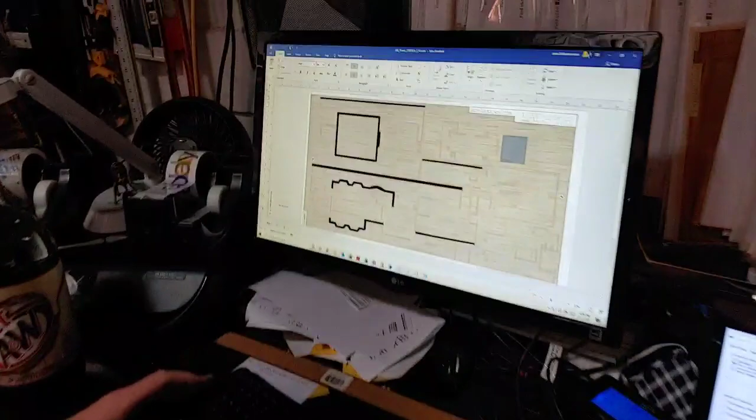So the printer is controlled by the computer here. And this is the pattern, for those of you familiar with the boat deck. This is it.

To give you an idea, when I'm editing the boat deck, this is typically the scale I work in, about 1500% magnification. This is the level I work at when doing all my little planks, rounded corners, and adjustments. Now, the printer doesn't quite exactly register with the laser cuts.

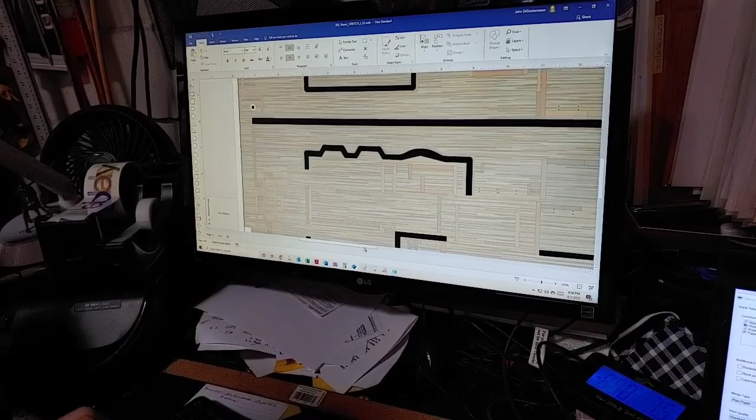So if I turn on the laser cut layer right now, this is going to look a little funky. You're going to say that doesn't line up at all. It's because I had to stretch this to make it fit. So at this end, you can see this line is pretty much going right through the middle of this shape.

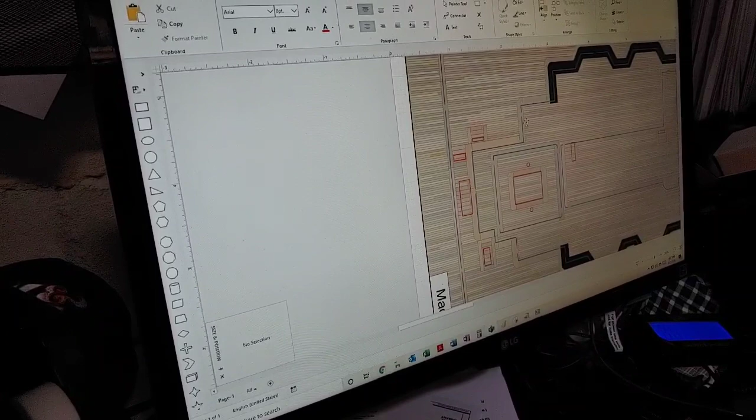And if you wonder why some lines are red and some are blue, I always cut the red first because they're little blow-away fallout pieces. The blues are more significant outer perimeters where the wood tends to curl up more, so I do them last so the wood doesn't curl while it's cutting.

So now you can see this one is roughly centered, and these are roughly centered for what we're going for. By the time I get down to the end, it's like I'm missing the target completely. Let me turn on the alignment layer.

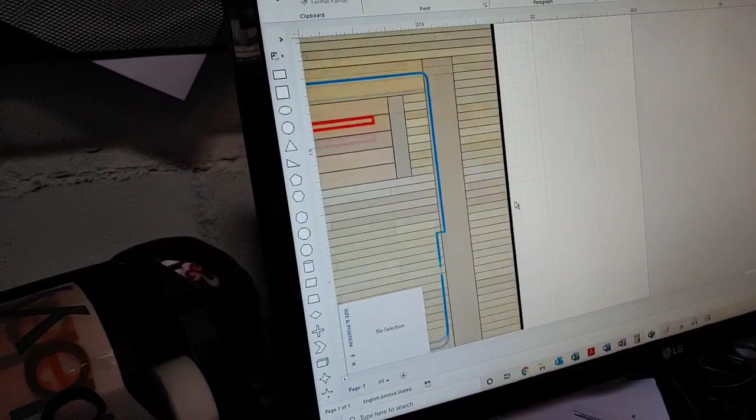So this just isn't some old guy with an X-Acto blade sitting in the mountains of California drinking beer doing it. No, this is pretty high-tech stuff. I've been involved in computer graphics since the 1970s, so I've been around doing this for a while.

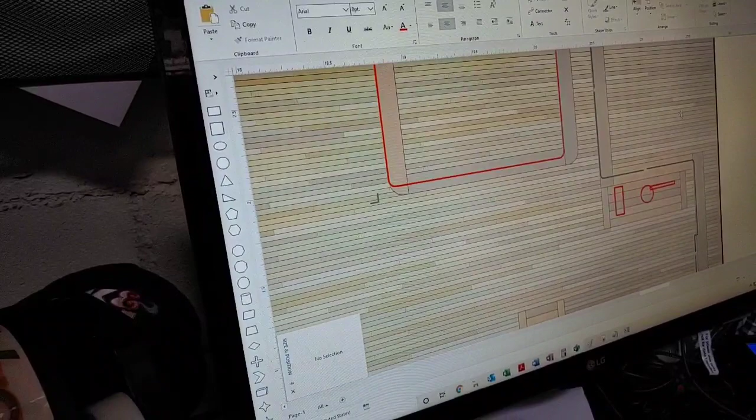So this is actually the pattern for the laser cutter. When it's supposed to do this mark at exactly 21 3/4 inches, it'll do it at 21 3/4 inches. I found that when the wood came out of the printer, it was about 1/8 of an inch short, and it wasn't reaching the alignment because the scaling on the printer is just slightly different.

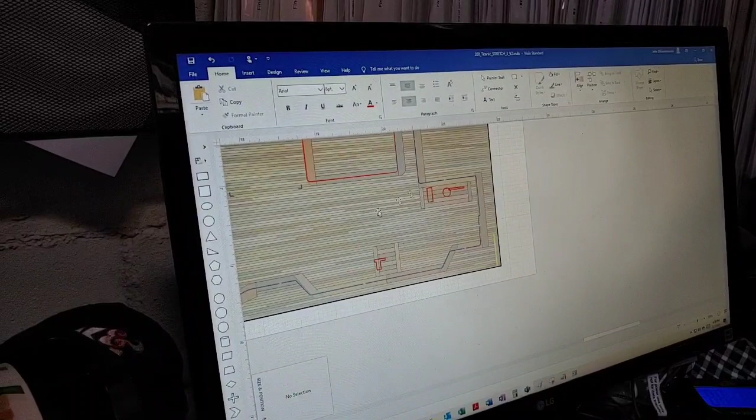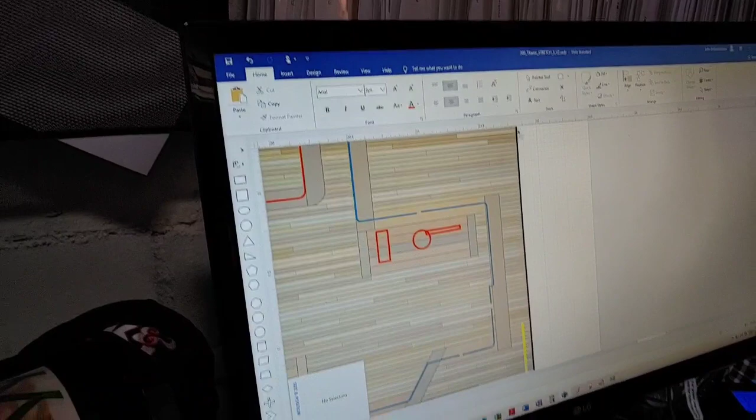So after I get everything worked out and all lined up perfectly, I have to take the print pattern for the wood and stretch it over just that tiny amount. Even though I'm telling it to print, say, 21 3/4, 7/8 inches -- that's 21 13/16, something like that -- when I tell it to go 21 13/16, it's actually going to come in at 21 3/4, and it'll be exactly the way we want it, and you'll see that once it prints.

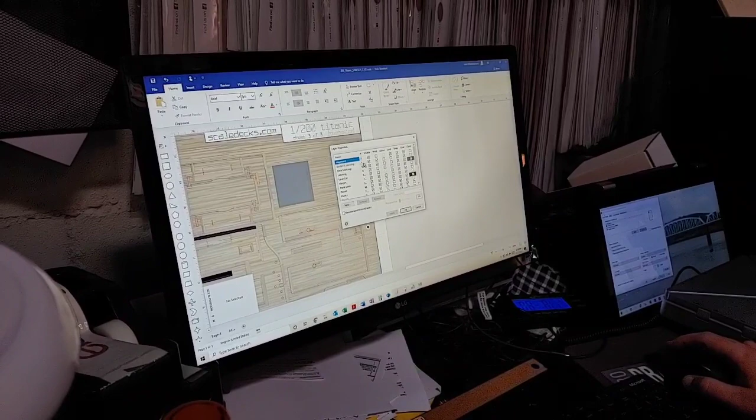So now I have all these layers, in case you want to see them. I'll give you the breakdown of the plan. What we have is the alignment, or the yellow corner marks to help me place the sheet of wood, and the border and labeling. We can turn that off -- see, that's all that stuff -- and we'll put that back on.

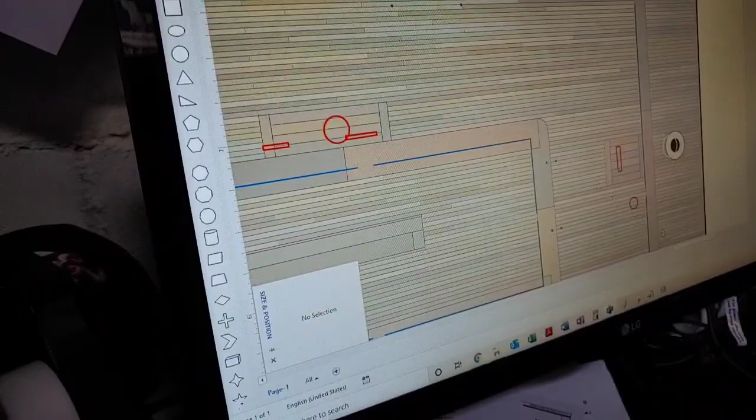The deck markings are typically the little gray dots for where the benches go. The labeling and laser cut are the blue and red lines. Let me show you here -- we'll go to right there, that's where the bench would go, and there's another bench that's going to go right there. Keep note of that, everybody -- I didn't know that until now.

So they actually have little tiny dents in the kit in the plastic deck, but I don't want to drill holes in the wood deck to indicate where the dents are, so I put those little tiny subtle gray dots. We have that, and interesting too, here's the alignment mark -- you can see how far off it is here to the right.

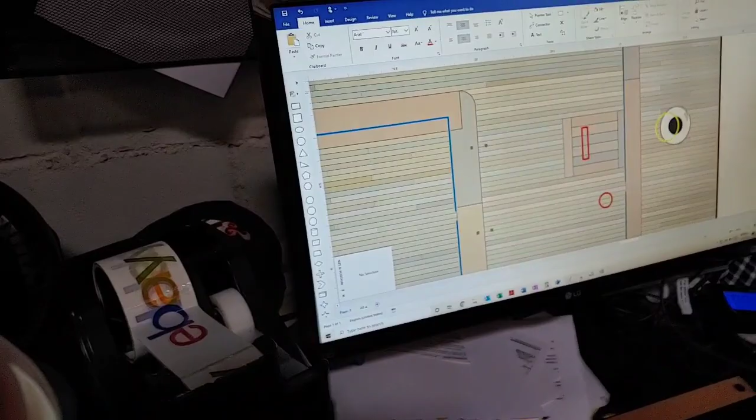But again, this is all going to line up once we get that done. So you can see the yellow target totally misses on this extreme edge, but you'll see it all works out in the end. So going back to the layers -- remind me to get photos of those gray dots before we leave so I can do a resource post on that. Sure, and so other layers, okay, here we go -- so now it gets good.

The margin are all the margin planks, so if I turn them off, you get that. And interesting, you can see this is where I've done what I call the normalization of the boards -- I've stretched certain boards or made them longer so everything works out right. I hide that under the margin planks, so you never see that.

You're getting to see behind the curtains here, so that's pretty revealing stuff.

If you look really close at the planks, you'll notice the longitudinal lines separating them are actually darker than the butt cuts. That's because the edges of the boards were rounded, so they cast shadows and caught a little light. When they did butt splices, two boards end to end, it was just two boards pressing, so those lines are really light and subtle. When you print this, you can barely see them. They're much more dramatic here.

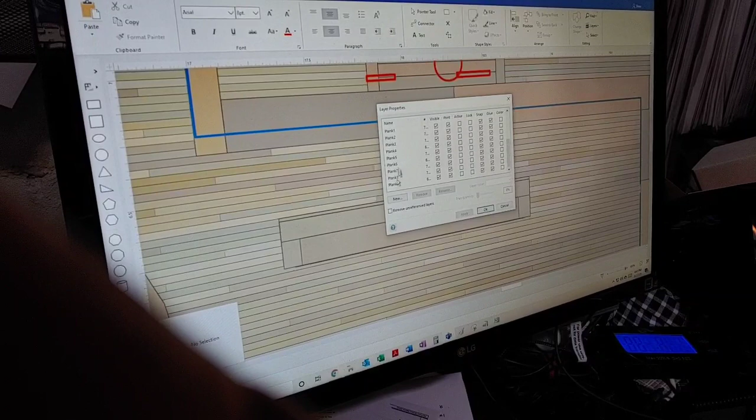So again, there's the margins. Let's see what else we have in this plan. Past that, there's all the plank lines, and these are all the different colored planks. If you want to know how many different colors of wood there are, the answer is 10 - plank 0 through plank 9.

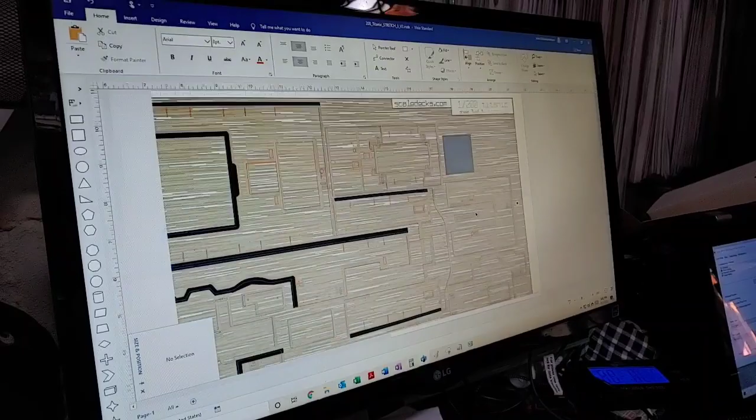If I pick one at random and turn it off, let's turn off plank 4 and see what this does to the pattern. Wow, those are all the plank 4s. If you want to see where those are distributed, that's a lot of wood - they're pretty randomly distributed throughout the whole deck of the ship.

And what if a woodchuck chucked that wood? Yeah, exactly. So we'll put all the plank 4s back.

So we go back to layers. This is when I was adjusting the tints, trying to get the yellow pine right. I'd say it's a little too green, so I'd find the greenest plank to make it a little less green. Or it's too dark, so I'd find the darker planks and lighten them. If it's too contrasty, I'd work that magic in between. So turn plank 4 back on, apply it, there we go.

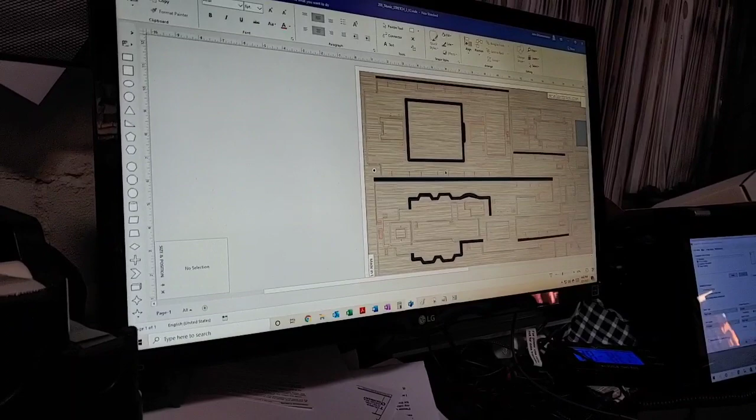So again, this is the Print Master. This is what I worked on - all those hours upon hours of getting not only the laser cuts right, but all the individual planks, the margins, and the waterways.

Here's a good example of the nibbing we were talking about earlier. You'd see a curve that goes along, but they cut off the ends of all these boards. This is actually a custom polygon shape.

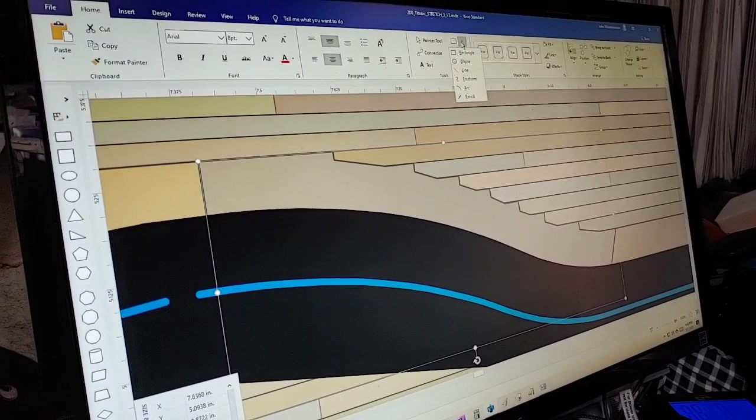If I go in here just to see it, these are all the points, and I can look at this and go, oh, that one's a little bit off - has to be off by at least 1/1000th of an inch. So I'm going to straighten that up. Nope, don't want to do it. Let me see, you can say I put it there - that's not right, I better put it right here. So right there - oh, that's not right either.

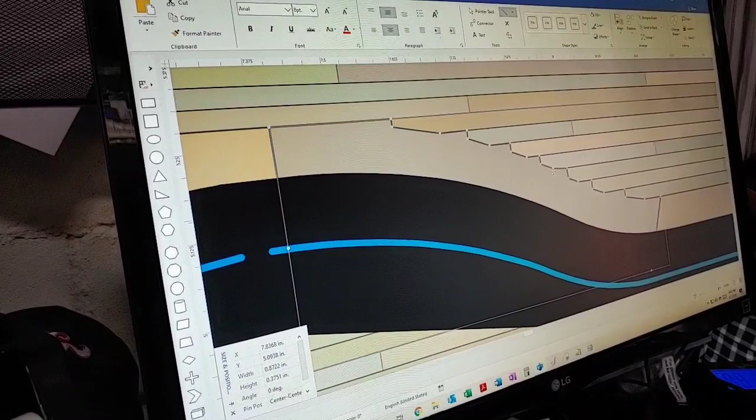It's got some other sort of reference point it's trying to go to. That may be better, may not be better, I don't know. When you look at this the whole time, it's a very, very subtle detail. But that's the work we did for all these nibbing pieces all the way around - you can see it there and all the way back.

And there's rivet counters, and then there's nail counters. Yeah, and I'm definitely a plank counter. You got to make sure the planks are right, because that's what you people are paying for, and I do my best to get them there.

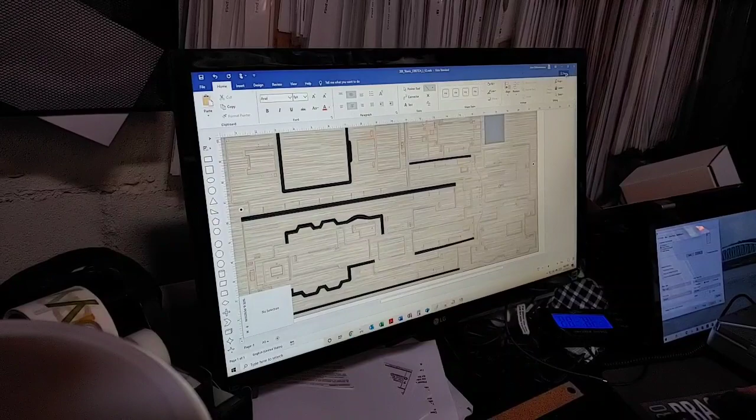So now, if we look at this, this is what's visible on the screen - everything's visible, you can see it all. When it comes time to print the wood, I am not going to print the alignment marks, those yellow marks or the yellow dot - that's just going to confuse everything. I'm not going to print the labeling, which is my instruction labeling, and I'm not going to print the laser cut lines.

So if I say OK and do File Print, it shows me the pattern, and now this is exactly what's going to go to the printer. You can see the little gray marks for the benches, but there are no red and blue laser cut lines - those are not going to print.

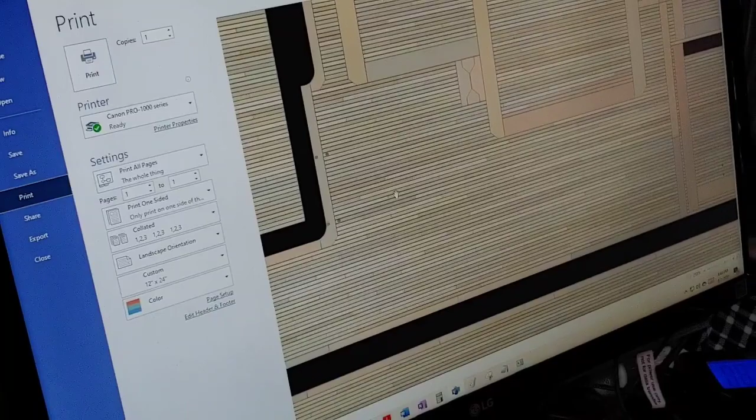So that's going to my Canon Pro 1000 series, for a 12 by 24 inch sheet of paper. I take a look at it, zoom out - I should have this much leftover wood at the end. It's going the full width, not doing a page break or anything stupid, so we're good.

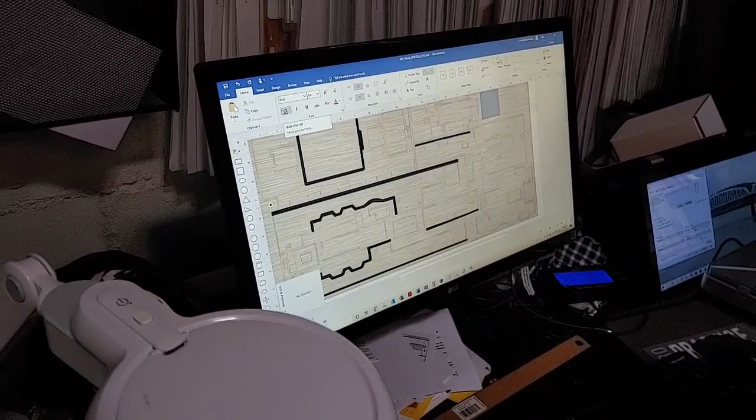So I print one, and we'll do the first test print, here we go. And how long does it take for the first one? For a sheet? You're about to see it.

I'll answer that question by a demonstration. There are 10 sheets of wood in the printer right now, and here comes the first one. The printer is warming up and loading its ink tanks and doing all that. There it goes.

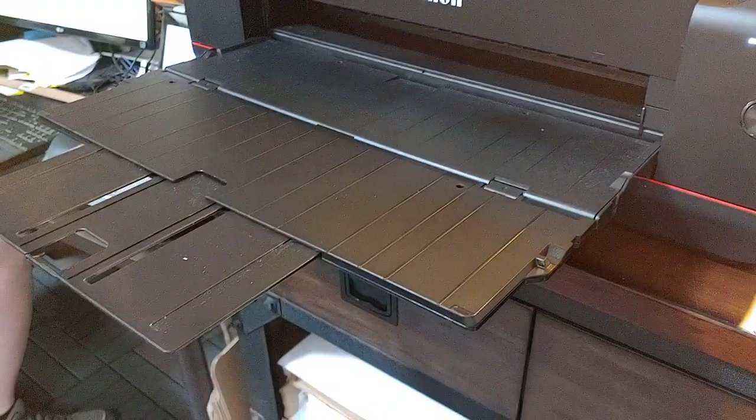Once that peeks off the bottom of the printer, I make sure that the margins are right, left and right. Then I'll tell it to print the next 9, and then we'll move on to the next step.

Is that when you check it over on the table, when you lay it on your previous laser cut? I will, that's for an alignment step. So now I look at it, I want to make sure everything's right, that it's centered between the pieces of wood. The printer knows what it's printing on, it knows it's got the margins, it's lining up nicely on the piece of wood. That's good, so now I tell it to print 9 more.

You know, without these even being laser cut, these would be worth framing. They look nice, they're pretty amazing.

Okay, so now 9 more are on the way. That printer's going to crank out 10 of them. And so while that's happening, now let's get the laser cutter started. So if we go over to the laser cutter, let's take a trip over here and see what it looks like.

How long do you have to wait for that to put the coating on it? I do not coat them. They're pre-coated for inkjet printing, and I send them out natural wood. I let the modeler, if they want to do something with it, to sand it, to make the color subtle, or chalk it, or pastel it, I don't put any sort of coating on it. I misunderstood that, I thought you coated them after they print. Oh no, it's before the ink goes down. So I get it from the mill with the coating on it.

So there we go, so let's go over here. In fact, wow, I think I can show you. Look at this guys, that wasn't even, what, 4 minutes, 3 minutes? Yeah, it's pretty quick. So here's some other ones.

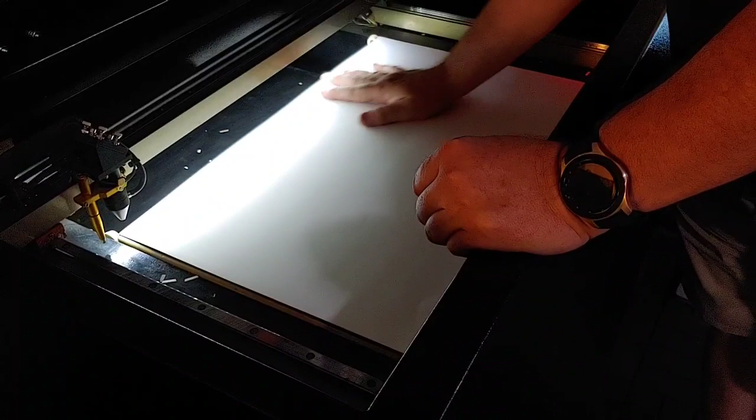So here we go, all right, over here to the laser cutter. Right now inside I just have a big piece of cardstock, and this is what I'm going to be laying the wood patterns on, but I need an alignment pattern. So I'm going to go back over here to the computer and get that cutter to do its thing.

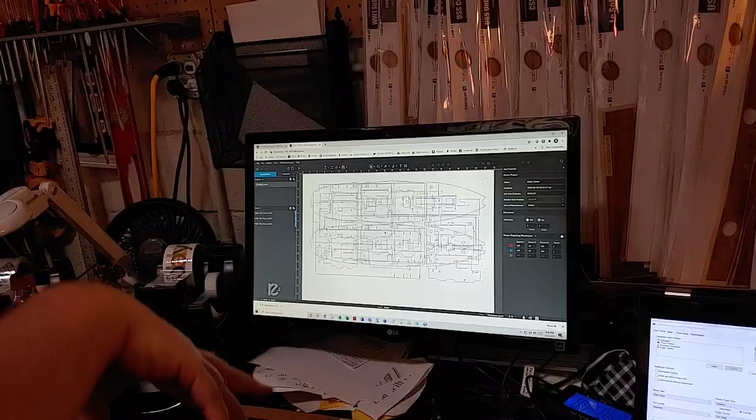And we're left with this. If you want to see what sheet 1 looks like, that's the most distinctive shapes. I can turn off sheet 3. There we go. So this is the box fit cut, and this is the high detail cut.

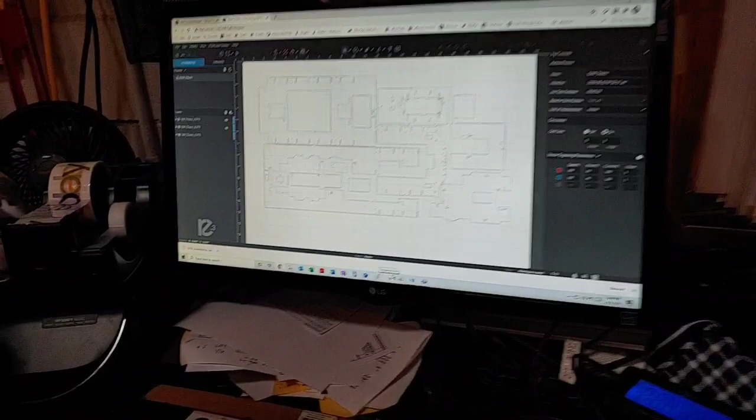We're going to turn off sheet 1 and turn on sheet 3, because that's what we're going to be cutting. So this is the pattern that we're going to cut. That should be recognizable as the boat deck for those of you following along.

To cut through this thin sheet of wood, I run the cutter at about 40% power, which is fine. Those yellow alignment marks, remember I showed you those, and there's this little circle right here. That's going to help me line up the wood and make sure I get it right.

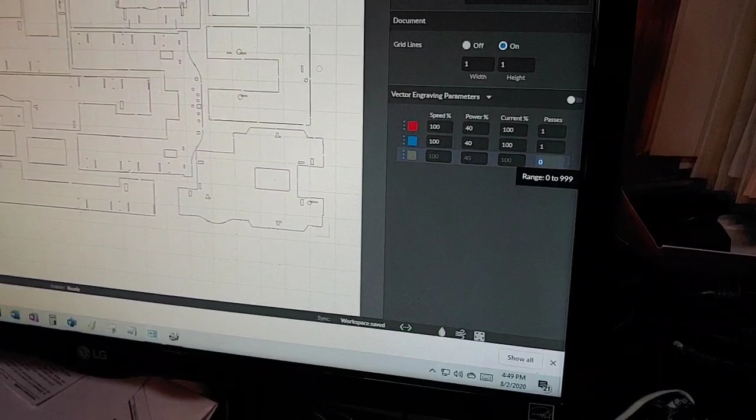Those, I'm going to run at 100% power and make 2 passes on them. That's going to make sure it really gets through that much thicker cardstock.

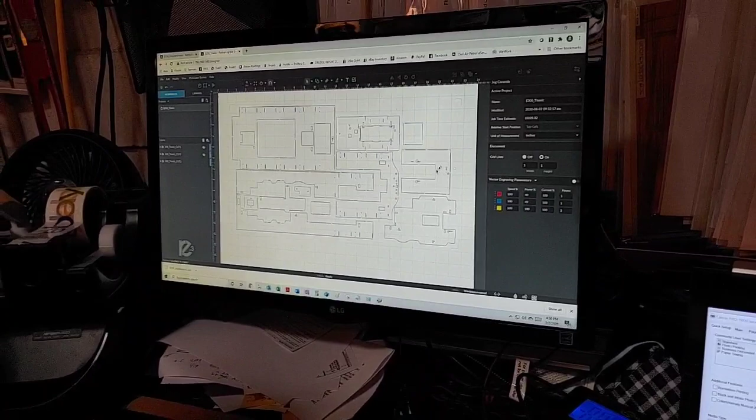So the order it's going to go is it'll start by cutting all the red shapes. Again, those are little detail holes that aren't going to violate the integrity of the cardstock at all. Then it'll do all the blue, which are longer cuts that can make the cardstock separate a little bit and shift around. That's why we do all the red first. And then the last thing it'll cut is the yellow corner marks and those 2 little alignment circles.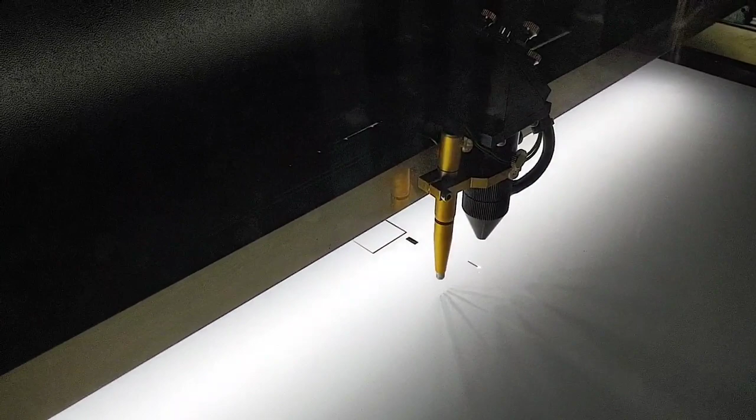And how many times do you use your alignment for each sheet? A lot. Yeah, so right now I'm planning on doing a run of 20. I will probably use this sheet of cardstock for all 20. Now, actually I do 2 of them, and we'll show that in a minute of why I do that.

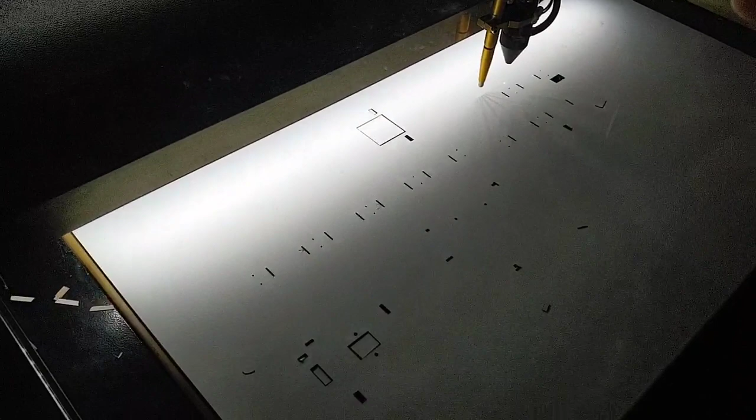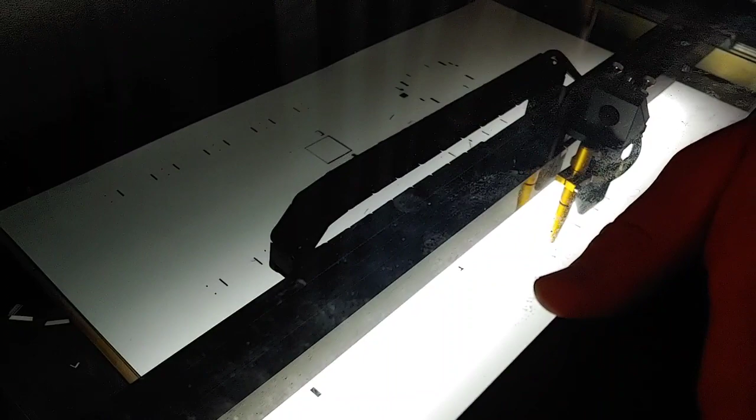Typically I can easily get 10, 15, 20 out of a card. If the laser goes weird, if it loses something, if it has a hiccup, it'll screw up the pattern and I may have to go back and cut a new one, but that's more the exception than the rule. Usually the cardstock runs are good for the entire run.

But you've done this so many times, you know what to look for if it's a nuisance. Oh yeah. And it's usually pretty dramatic. So weird things can happen, particularly not so much on this cutter. This is a much better cutter than the little Muse I have next door. It's got much better tolerances, less prone to error.

That's what the last 2 of my Emden Dresden are for. To give you an example of the engineering on this, I'm going to unlock the head here. So this is the gantry. This is the way a laser cutter works.

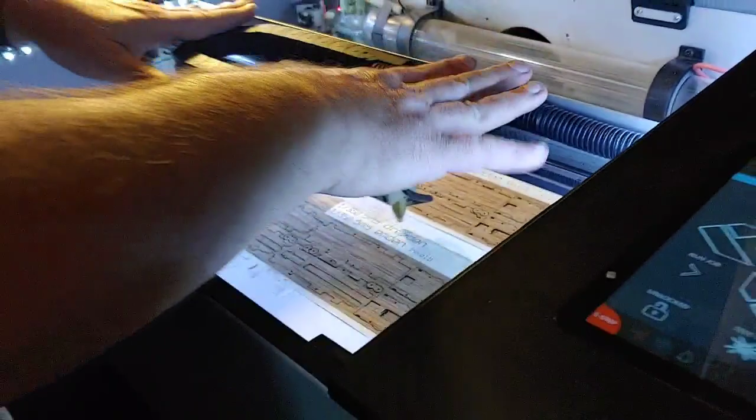The head moves left to right, the gantry moves front to back. That glass tube in the back is the actual laser. That's it, and it doesn't move, it just fires its laser beam into that mirror, which hits this mirror, which hits this mirror, which directs it down into the material that it's cutting.

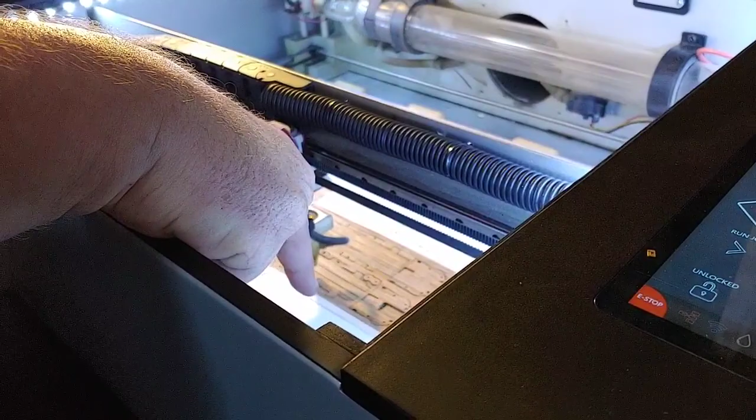Wow. So, to say this works with all smoke and mirrors is absolutely what it does. It just moves the mirrors around to put the cut where you want it to go.

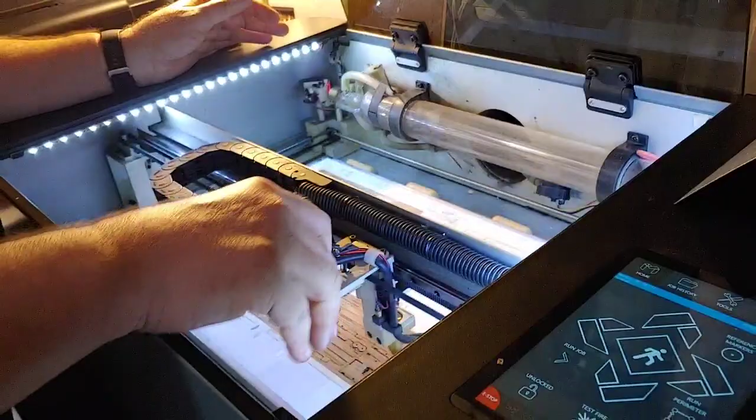But one thing about this design, if you look at it, it's got this rail up here, and these lights were an add-in feature for this model cutter, which is really nice when looking at the workspace. But believe it or not, they're just held in by a hot glue gun. It's not screwed in or bolted or clipped, it's just hot glue.

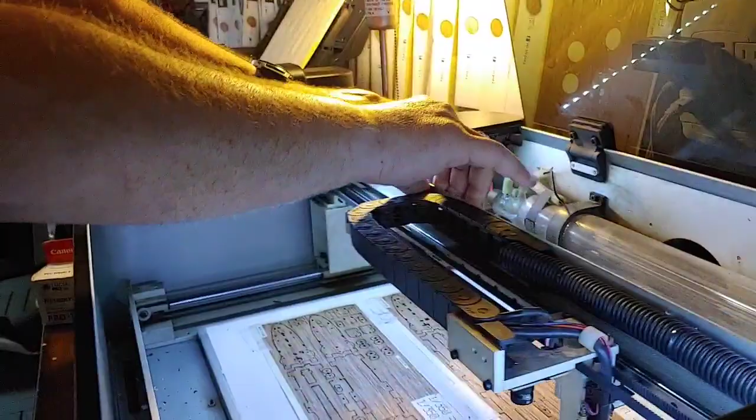Well, it's hot in here right now, and the other day one of the lights dropped out a little bit. It came down and caught the top of the gantry, jamming it, so it couldn't move. The laser cutter was just going back and forth while the gantry wasn't moving, so it was cutting this huge, deep burn mark.

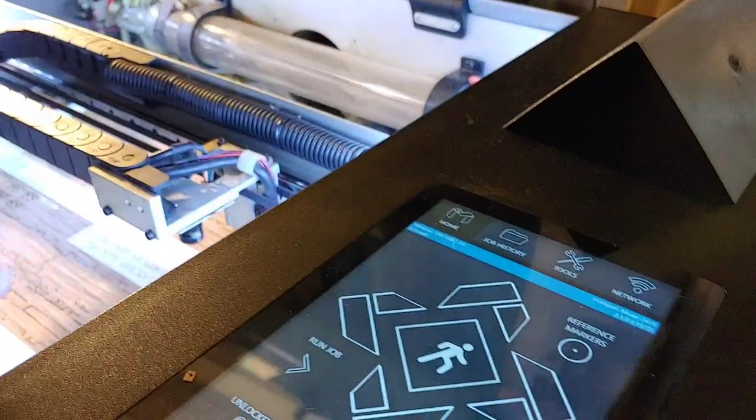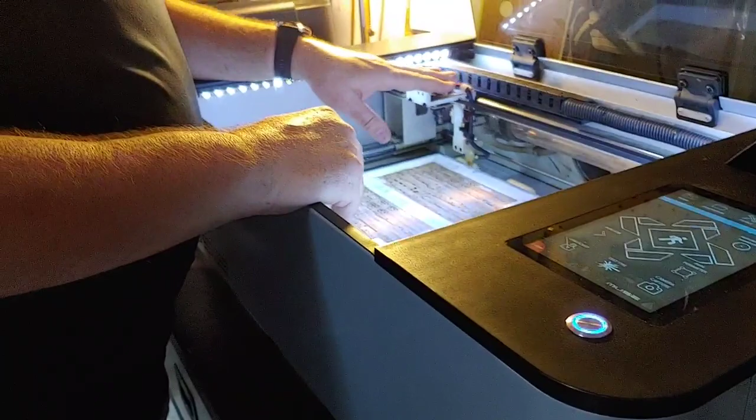So then what do you do? You pop this off, take it in, reattach the lights, get it so it all clears, get it so it works, and away you go. But just little mechanical things like that, you know, after a while you learn it's all part of the process.

So is this one a mirror laser too, or is it a direct? Same thing. If you look over here, the laser actually starts in this extension box and goes all the way across the back and ends about here.

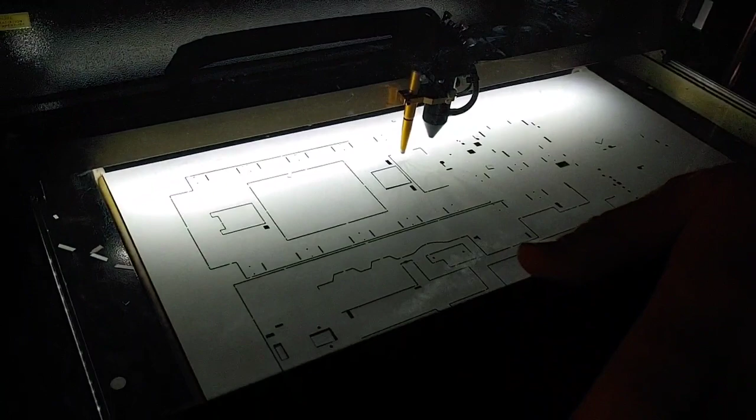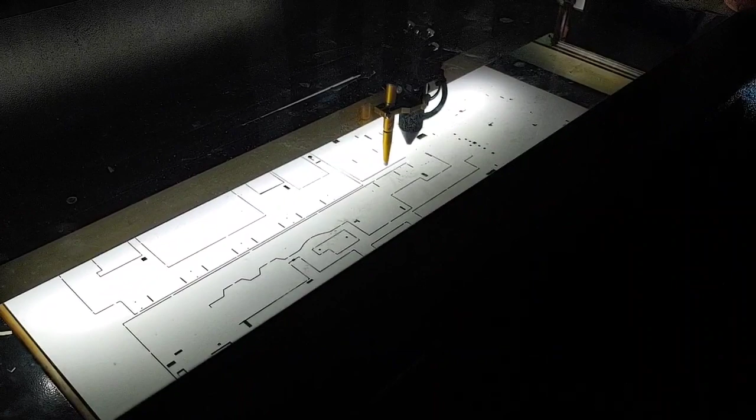That's a 40 watt laser or a 45 watt. I have the more powerful one, a 45 watt laser. This is a 90 watt laser. The reason this laser is so much more powerful is because the head moves faster. If the head moves faster, it spends less time over the material, so you need more power to ablate through it. I was surprised that since it's twice as powerful, I started running it at half the cutting power as the one over there, because the laser's twice as powerful, but the head moves twice as fast. So I run both these machines at about 35 to 40% to cut through the material.

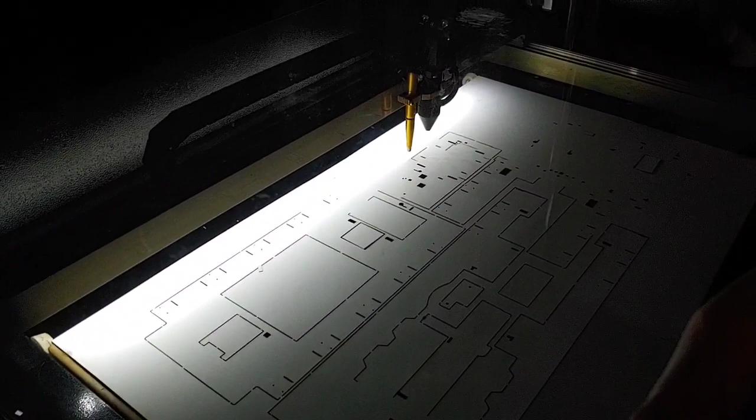So now it's on the blue lines, the way it goes. That one is set and ready to go. I have another tray exactly like it right here.

I haven't taped the tape to the front yet because these trays tend to flex a little bit side to side. One of the biggest things I was working on with the Titanic was finding a way to get these trays to absolutely lock in place. So I ended up putting these wood brackets on them to give them a little more width to the side, so they just fit snugly in the cutter frame.

The other thing I did, we can see it when I take that one out, is I put in these little bumpers like we have up here. I added those front and back, so it keeps the tray in one position front to back, and the wood keeps it tight side to side, so it should go in pretty much exactly the same position.

I was going to ask you how you did the register from machine to machine. Yeah, and that was tough. That took me a long time to get that system right. Believe it or not, this little Muse cutter, I use...

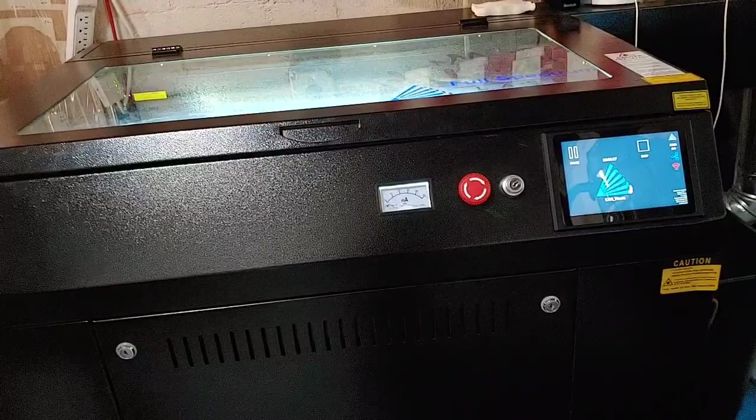Basically the bumpers that I use on there are the little rubber bumpers that go on the underside of toilet seats, the little self-adhesive ones. They're perfect for locking the tray in.

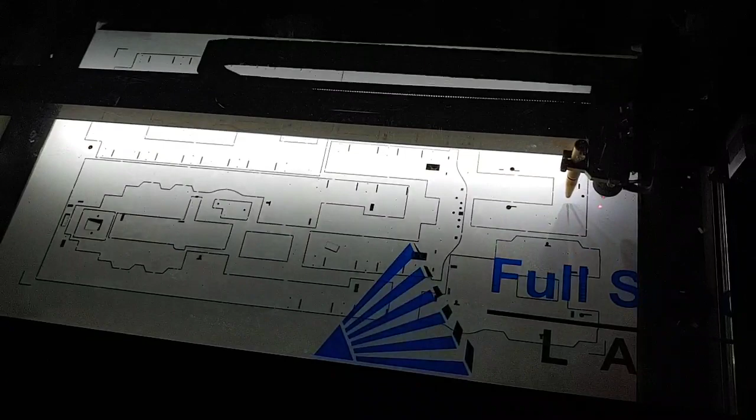So right now this is down to 16 seconds. Now it's cutting the corner marks. There's that circle target. Next corner over there, corner in the upper right, up circle, now the corner in the upper right, and it's done.

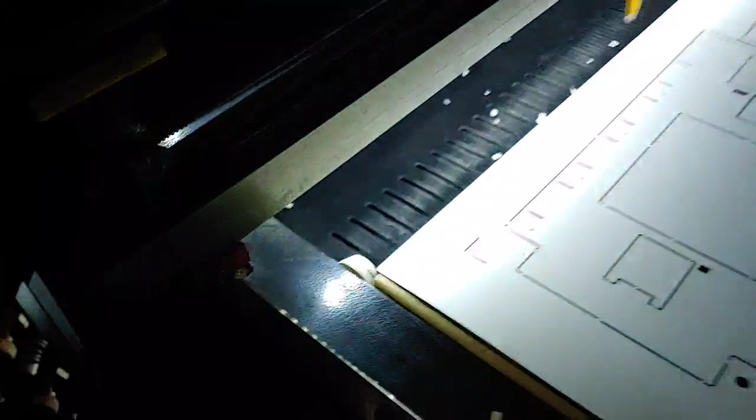Okay, so I'm going to... I see those bumpers, there they are. So those bumpers keep it from going front to back, and then the wood fits exactly in between these two rails here to keep it from going side to side.

So we'll see that as we put the next one in. Here's a blank one. It goes in like so, I press it down, nowhere for it to go. So now I've got my alignment done. I tape this down, that looks good. Close the lid, I tell it to repeat the last job, and it's going to do the exact thing all over again.

So now we go over to the printer. Let's see, I've got 1, 2, 3, 4, 5, 6, within seconds of being done. So you can see that printing is not what takes all the time.

I go over here to my other rolling cutter, and we're just going to take the little tail off. So 1, 2, 3.

So typically, again, when I'm not narrating, this is getting in the way. There's my little guide mark for width, so let me take that out.

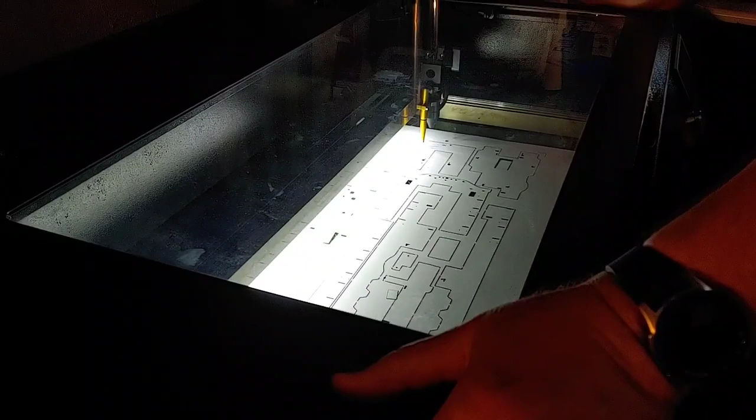Out with the old, in with the new. I only have to do one change now. One question before you close that.

Being that this is the first one, you will know by looking at it, since you've done so many already, whether or not you need to adjust anything. There shouldn't be anything adjusting. If it comes out hideously wrong, then yeah.

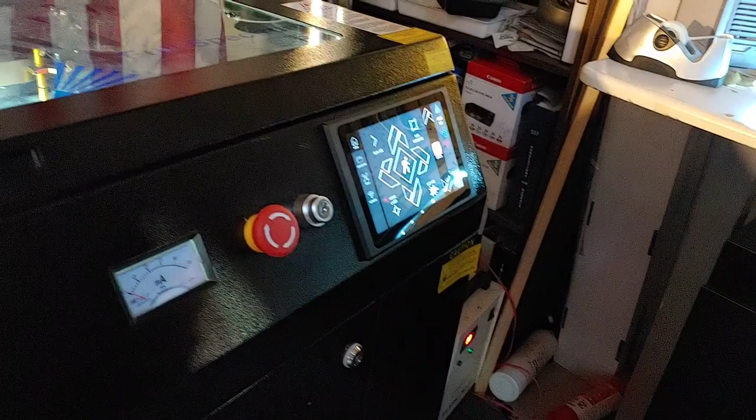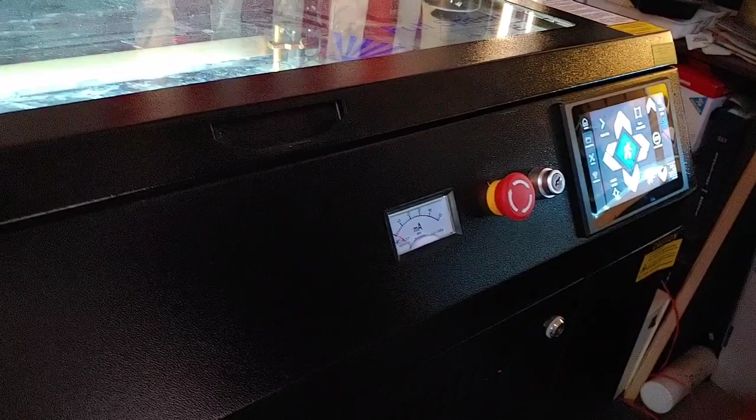Okay, so let me show you one thing that I always do. In between each one, I hit this button, which is home laser, which tells the laser to go back to where it knows is its distinct home. If it hits an edge, it catches a little scrap piece of paper that jams up the wheel. If you know anything about navigation, it uses a technique called dead reckoning. It says, I'm at 0,0, because I moved 10 inches over, so I'm 10 inches over. Now if I move 2 to the right, I'm 8 inches over.

If I move 2 down, I'm 8 inches over and 2 down. So it tracks all of its movements and adds them all up. If something screws up a movement, it's not where it thinks it is, and then everything else gets off alignment. Some of the Heidelberg mini 4-color presses that printed day in and day out, if you didn't go back to home after doing a run and you hung another plate, it was completely lost. Yeah, exactly. So it's just a habit I got into.

So now that was set to cut cardstock. So now to change it to cut wood - oh, my printer, you're lucky, we have to replace an ink cartridge. That'll be exciting. But before we do that, let's go here.

Now remember, I'm cutting the red, I'm cutting the blue, and I'm doing 2 passes, super intense burn, of the alignment marks. I don't need to cut the alignment marks because I'm cutting the finished product work, and I don't want to put holes in that. So now I just turn off the yellow, and now for the next 20 jobs, I'll just repeat that.

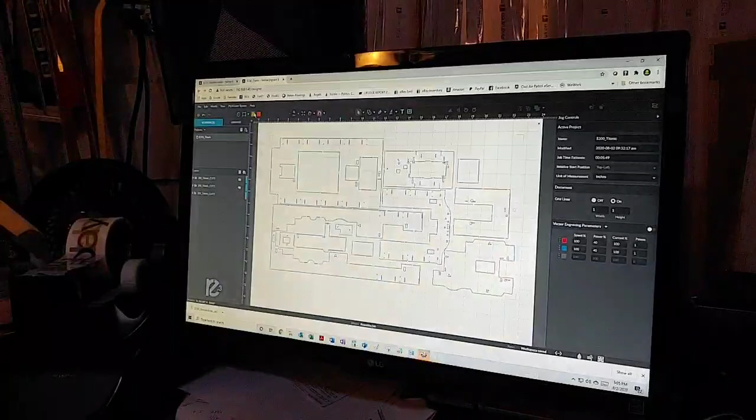And so start that running, the cutter goes, the printer says it's out of ink, so let's do the ink. So how much, taking that one step out, how much does that take off the time? 8 seconds. That's not the point.

The main reason that I do it is I need - this is yellow, one cartridge, guys. This is the size of a pop bottle almost. That's one ink cartridge, and this printer uses 12 of them. 12, and they are $70 a piece. Next time you guys complain about printer ink - 12, at $70 a piece, yeah.

And not to mention, how much was that box of paper, $250? $1,000? That's $1,000. Over here, 250 sheets is $2,000.

Okay, pop out the yellow cartridge. Push it in. It's out. Yellow goes back in. Close the door. Open the tray.

What a lot of people don't realize is that the difference between an inkjet and a laser printer is completely different, totally different technologies. When I first started doing Scaledecks, I was working on laser printers, but the toner flakes off, which was interesting. The color just didn't play with the wood as well as the ink does. It soaks up real nice and gets a better consistent color, and you can get these big, huge inkjet printers, whereas big, massive laser printers to handle large sheets of wood like this, they're much harder to come by.

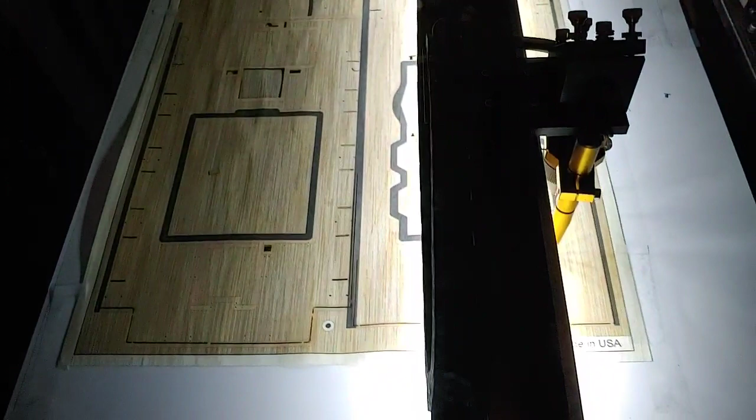And if you'll recall, I had that line pretty much perfectly centered there at the margin at the left. If you looked at it, that's pretty darn close to centered, right? The vertical line right to the right of Made in the USA - that's what I homed in, and I wanted that to be pretty close to centered. And that's looking pretty darn good.

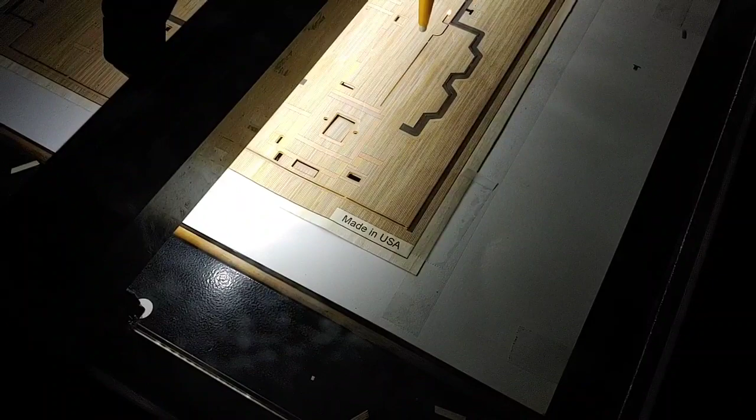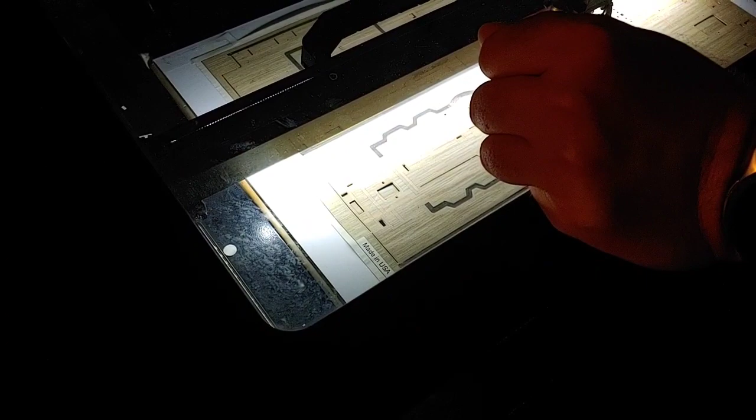So again, it's all about getting the wood placed on the tray where you want it to be and getting the tray placed consistently every time. That is the weak link in my system. If there's going to be a failure, the odds are that's where it is. I mean, I have my share of printer failures and other failures, but that's the common one.

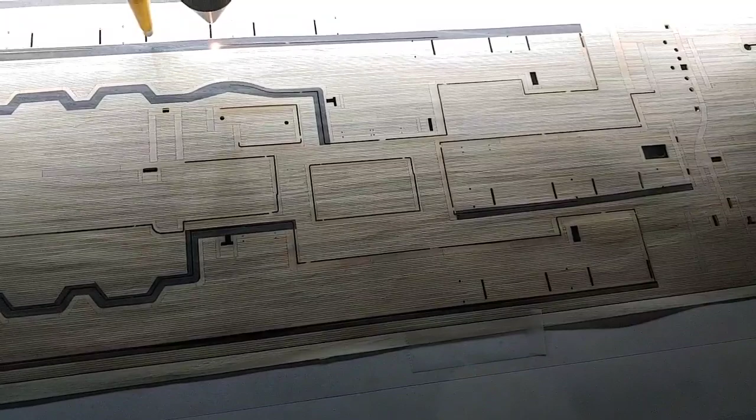So now if you look at that in the head, see those little gray dots? See it right there? And if you didn't know they were there, they're not going to be too offensive to you, as opposed to the holes, which I think would be more offensive. So I have looked at the Scaledecks photos and reposted them on the group. Somebody's asked me a question about something, and I'll pull it up and I'll look at it, and I never noticed what those gray dots were until you mentioned it. They're very subtle.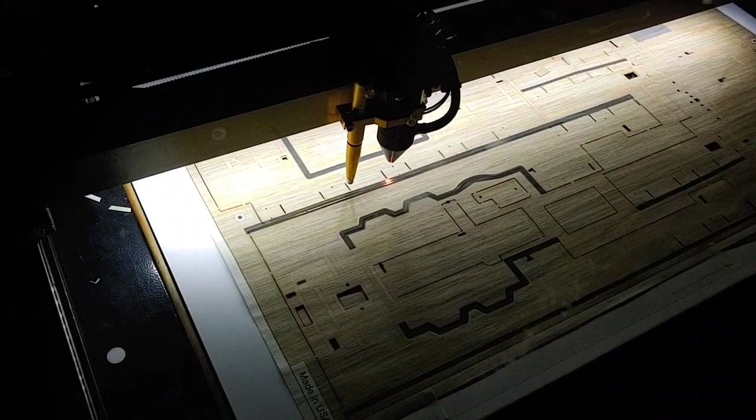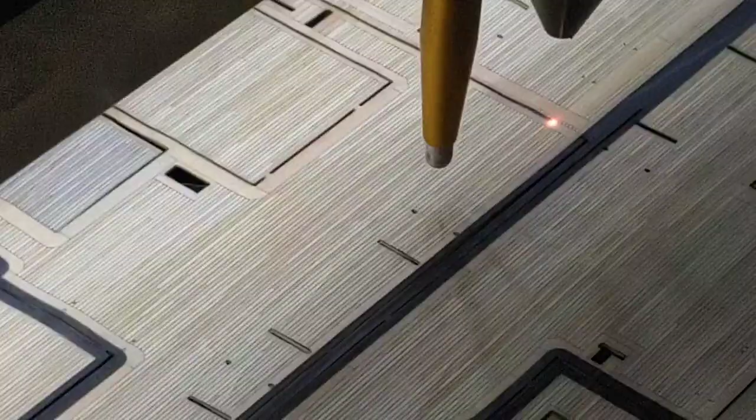So these planks are 1/32 of an inch wide, about 3/4 of a millimeter, less than a millimeter. I can go down to 1/48 or even 1/64, but at 1/64 the detail is so fine the human eye doesn't pick it up. It just looks like a fuzzy blob, you don't get distinct lines. So even when I'm doing a 1/350th model, I use 1/32 inch planks as my base size.

It comes out to almost exactly 5 inches in scale for the 1/200 Titanic, so it's a perfect size. But if you get one of my other decks for a 1/350th, the planks are the same size as my 1/200 Titanic, because this is about as fine as I can go.

It's funny, with the 1/48ths and 1/64th, it looks terrible to the naked eye. You put a magnifying glass over it, one of those big lit up ones, and it looks gorgeous, you see all the planks. I have one of those at home. But who wants to always look at their model through one of those huge magnifying glasses? You want it to look right.

This is 48 megapixel and it's an awesome photograph. My big motto is, if you want to find your own mistakes, photograph it and enlarge it.

Okay, now I've been spending my time talking, which I shouldn't have been doing. I should have been prepping this one, so now I got to put the tape on. I got to get this tray ready because I've only got 47 seconds. I think I'm going to waste time here, just get into a gab fest and forget I got a job to do.

So we take that, and now we're going to put a little tape guard on down here. 3, 4... 6.

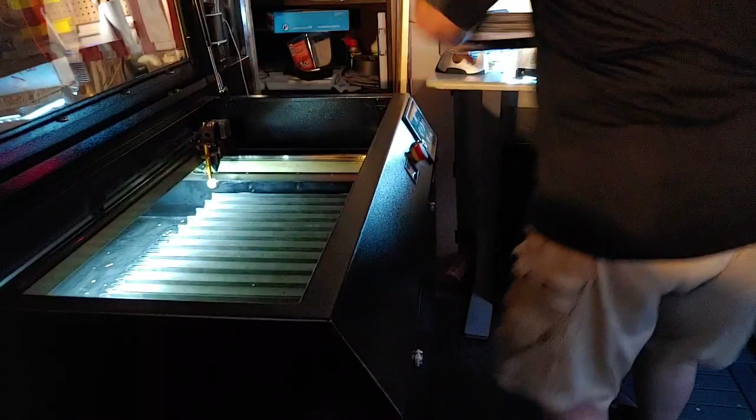Okay, so now here we go, here comes the quick change. You ready? Yep. Open up the cutter, this one's done. Like making pizzas, you know, or changing machine gun magazines.

A little tray shifter there, that drops in. Home the laser, repeat the last job. And go.

So if it takes 5 minutes and 45 seconds to do one of these, and it takes me 15 seconds to do a transition, that's why I say 6 minutes a deck. Titanic has 3 of these sheets, I think they're about 6 minutes, and the little one is only 5 minutes. So absolute man-hours, no doubt about it, just doing that part is about 20 minutes for each Titanic. That's about as fast as I can crank them through, so it's 3 an hour.

But didn't you have to do some artwork correction in the middle of that, or after? Well, I do revisions whenever I do a deck. I always try to make it as historically accurate based on the information available. One thing about the modeling community, there's a whole lot of people that know more than I do. I know a lot, but there's some pretty sharp people out there, and they'll say, hey, you got this one thing wrong. They know one ship really intimately well. I know a lot about a lot of ships, but there's people that are just absolutely locked into a specific ship or class. There's people in our group that know how many screws held in a deck light.